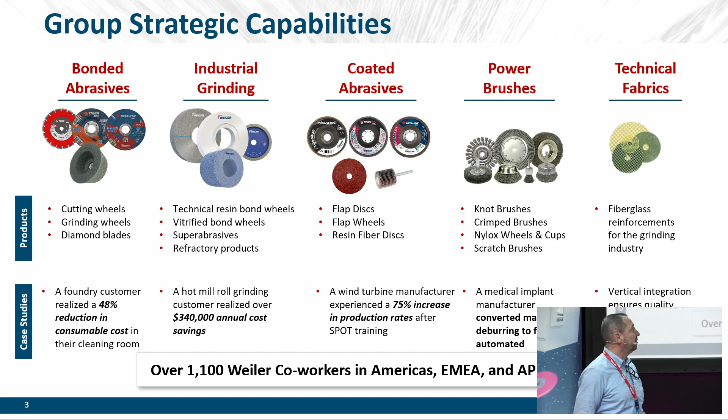During these five days we heard a lot of: who's Weiler? Where are you coming from? Because we're new, we're the new kid on the block, nobody knows us. That's why we decided to give a small introduction of who we are, where we come from, and what we're doing. We're coming basically out of the US.

Weiler is a German name coming from Pforzheim, a family from Pforzheim. In 1800 they came to New York as brush manufacturers, because in the Black Forest there are a lot of brush manufacturers. He found this energy in the US and started making brushes. That made us a brush manufacturer in the US - all kinds of wires, brushes, steel, Nylox, whatever. There was an evolution going to flap discs, coated abrasives. Weiler was one of the first to introduce the production of flap discs within the US.

Then finally they wanted to grow the business, and they bought a company, Swatycomet in Slovenia. Directly they became the owner of bonded abrasives, cutting and grinding, and our well-known industrial grinding. So that's in a nutshell what we are standing for.

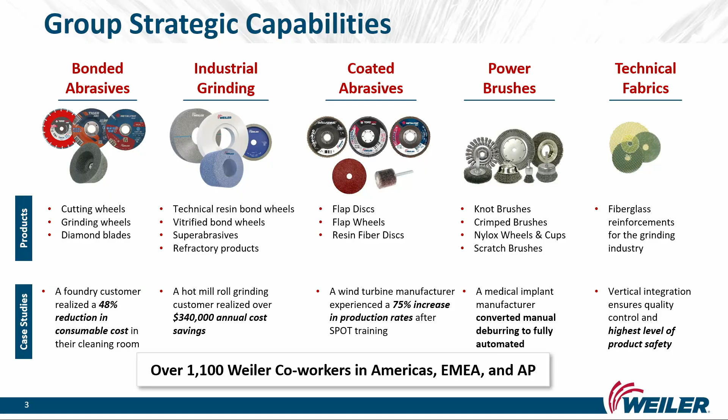Where are we? Cresco is the headquarters, about 1 hour from New York. There we still produce all our wire brushes. In Mexico we are producing the flap discs. In Brazil we have a small production of cutting and grinding, and mainly our foundry, small products, manual, like the pins and the small grinding wheels. That's for North and South America.

Coming to Europe, we have a warehouse in Bindlach, Germany for the German market, which is still the biggest market in Europe. And Slovenia - there we have 3 plants. The headquarters is Maribor, in the north, the second city of Slovenia. There we produce all our technical wheels, from vitrified to resin to CBN, the super abrasives - everything to do with industrial grinding, we produce in Maribor.

30 kilometers south we have Zreče, where we produce the cutting and grinding discs - 10 million pieces a month, which is an impressive number. Very high automation, high standing, state of the art for our production. In Loče, we produce technical textiles that we need for our cutting discs and for the reinforcement of our cutting discs. So that's in a nutshell where we are, who we are.

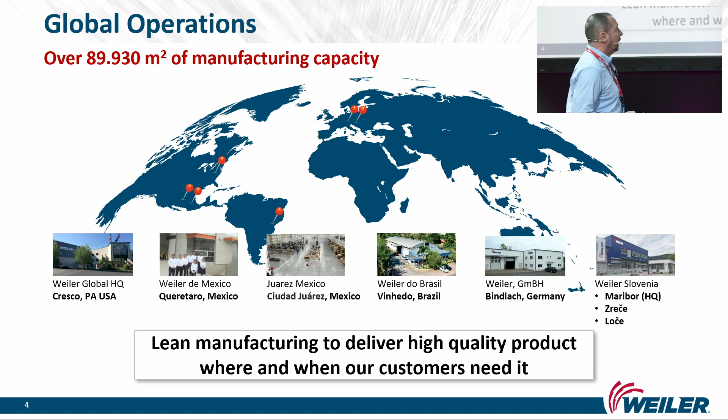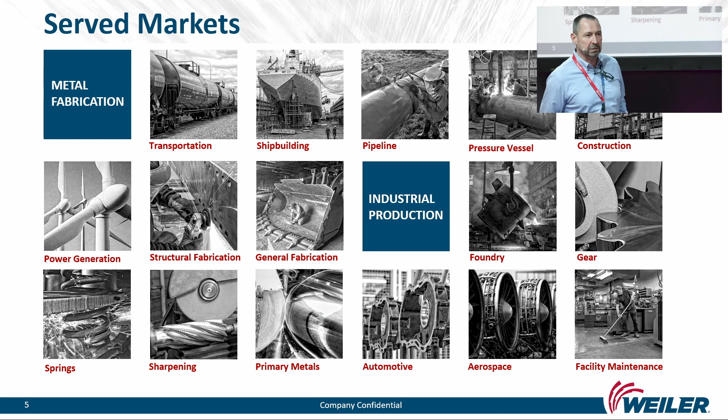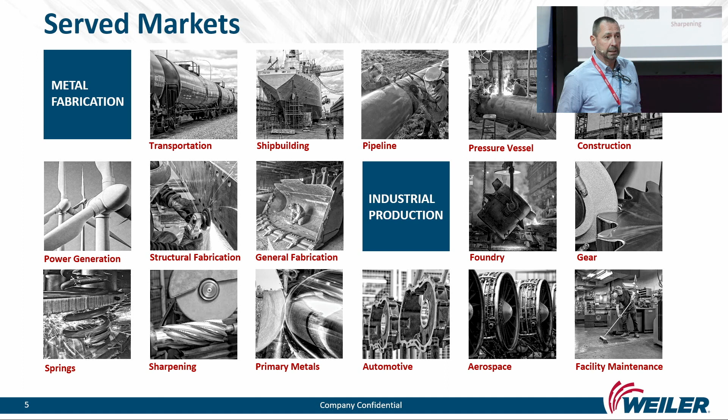Our markets are mainly cutting and grinding, transport, shipbuilding, construction. If we go to the industrial grinding part, we have the foundry, which is the heavy metal industry, the steelwork, but we also go to sharpening, aerospace, automotive, bearings. One particular thing is spring grinding, which is a specialty of our company.

Again, we've got the snagging wheels, the resinoid wheels for rough grinding, and we've got the more vitrified wheels for precision grinding. Springs sit right in the middle - it's precision, but with resin bond.

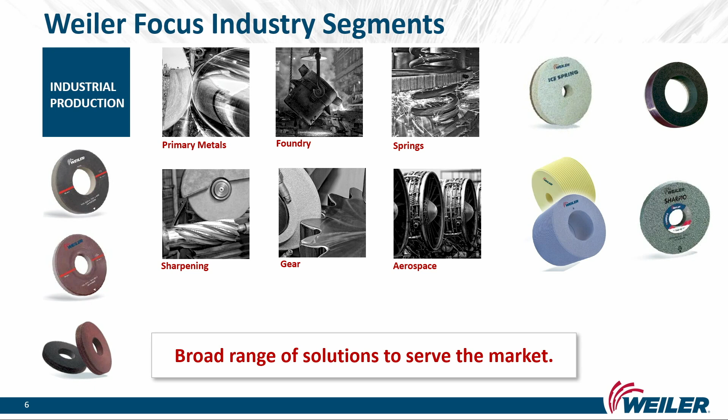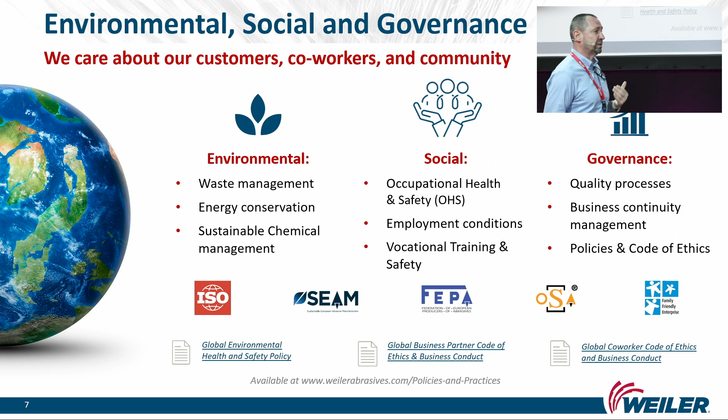So we're not working in a garage, as you've seen in the former slides. We are a member of FEPA, the Federation in Europe. We are OSA-certified for the security of our products - that's a high value - and of course all ISO standards. SEAM, sustainability - we're in Slovenia, there's a lot of nature, as people who know Slovenia understand. So SEAM is extremely important for us. It's the future trend, but for us as a company, it's one of our core values.

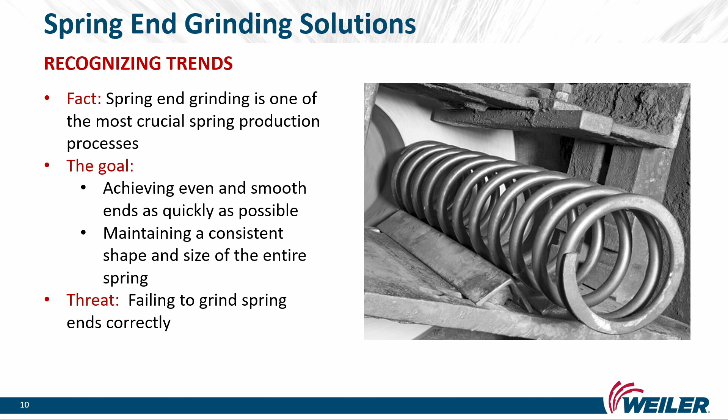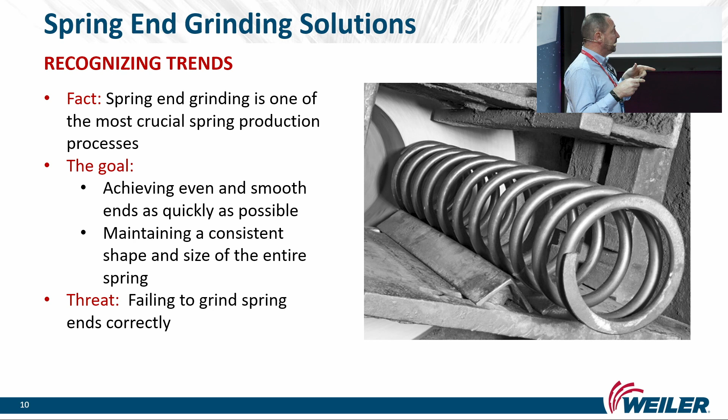Let's go to spring grinding. One of the crucial parts of producing a spring is the end, the measurement, and the surface. That's why we grind. This is the crucial part. We need to maintain the tolerances, and we do that by grinding. It's a very complicated operation that takes time, so we're always under pressure to bring more performance in one way or another.

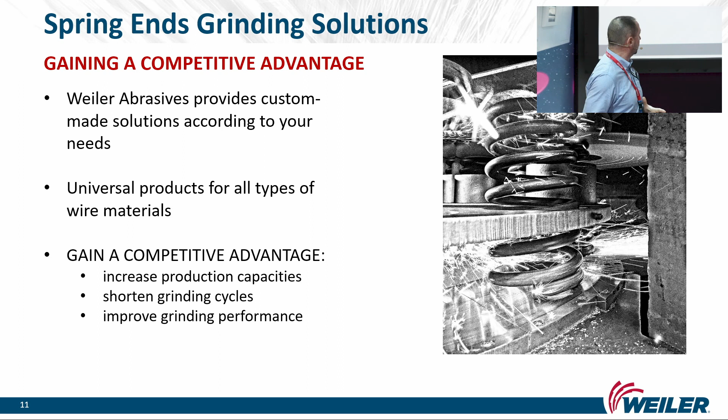In spring grinding, mainly, we have a table that is turning, for people who don't know, and the spring comes in the middle. The number of passes we do reduces the spring to the required dimensions. Of course, we try to increase production capacity by shortening the grinding cycles and improving performance.

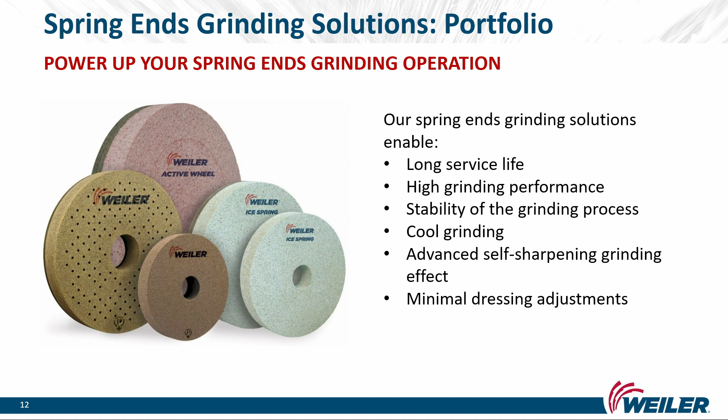So this is our portfolio. We will go into depth after that. We serve a bit of everything. We have three major standards within our spring grinding manufacturing. So what is our solution?

The first one is the common one that everybody knows, with the perforations, with the holes. Why do we need these holes? We need them for a cool cut, and also so that some stock removal we can't absorb gets into the holes. After that, it's cleaned up with some compressed air.

Now, the main challenge in the spring grinding industry today is that it's a resinoid product, with fluoride in it. It's a general topic now coming from Scandinavia. There's a new target to have wheels without fluoride. We're working on this because we know Scandinavia starts and then it slowly moves south, and when it comes to Germany, it becomes a rule. So we're discovering, developing with partners in Scandinavia these fluoride-free resin wheels. This is a really hot topic, and in the values of our company it's one of the highest priorities.

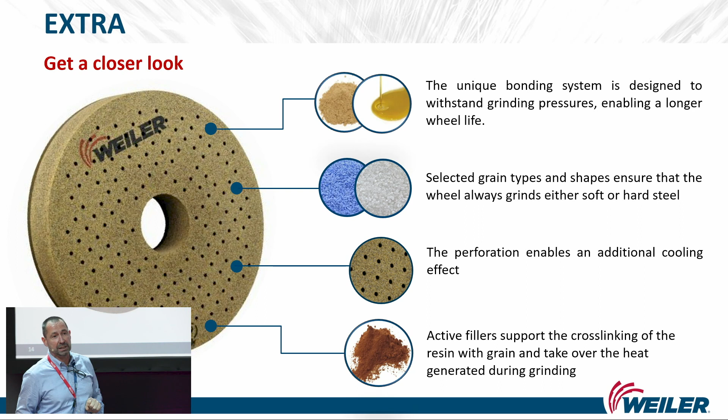So mainly, the big point is the filler, as you heard, the fluoride. That determines how good you are, how good you can perform, and exactly that filler is under a big challenge. Of course, we also have a selection of grains and our bonding system. This is a standard wheel.

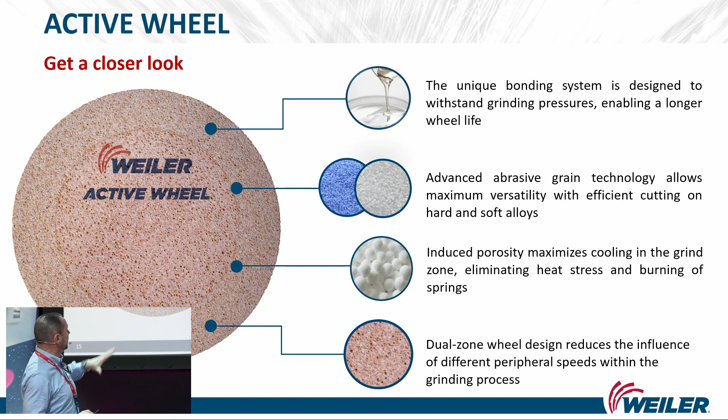Coming to the next one, it's getting a bit more technical. This is a wheel without a hole, without the bores you see. As you see here, it's a two-layer wheel. Why do you need a two-layer wheel? Because first of all, it's the same bonding system, slightly different, with a lot of porosity added, a hollow ball porosity. It's an artificial porosity we add to have the cool cut, like you saw before with the holes. Why do we need these two layers? One layer would be sufficient. Now we found out at Weiler, if you see, it's very simple, in fact you need to know it.

But if you look deeper, at the outside, if you have 100% of your speed, the further you go inside, the lower the speed is. That influences the parameters, it influences your performance, but it influences your roughness extremely highly. It could lead to burning marks. That's why we have these two layers: outer, we go with a rough grinding wheel; inner, we go finer, softer. This gives a good, cool cut. And that's where we already have a first step, where we're not only delivering a wheel, we also add value.

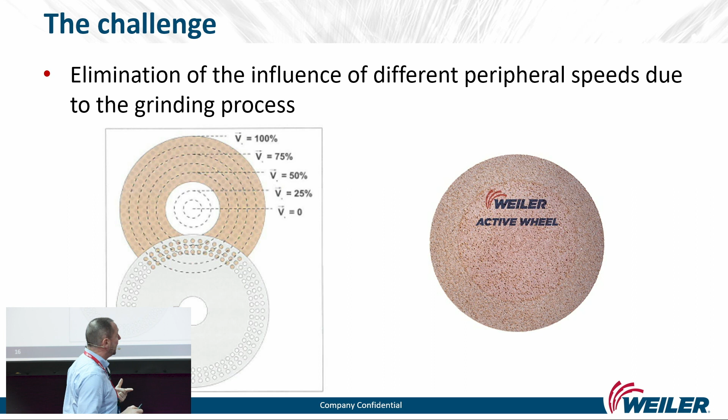And then last but not least, we've got the ice spring. It's just a word, but the key point of the ice spring is the bonding system. It's a liquid bond, an innovation from our company. It's a liquid bond, and we surround the grain well, and we add a lot of porosity. The big advantage is that we can cover all the diameters of the springs, with high performance, no holes, meaning a lot of grains are working, and we have this cool cut.

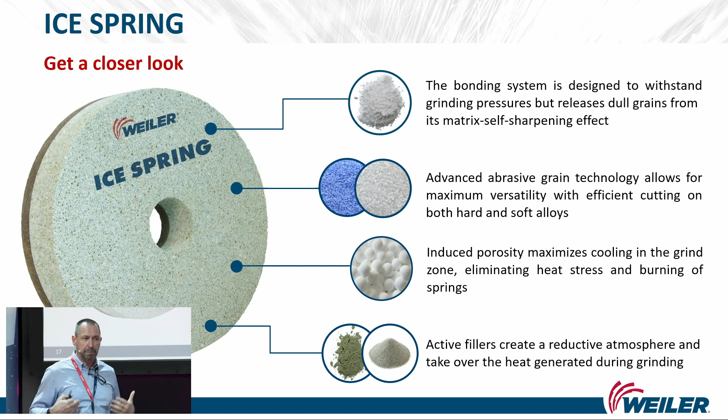This active filler, of course, is an internal component, but here too we're under high pressure from this fluoride issue, because this is the key that everybody knew or used, and that's now the challenge for us. We're the pioneer in this, we can say that. That makes us attractive to high-end customers who are looking for solutions, not only a price, but also sustainability. And as a matter of fact, the Scandinavians are in the first line, directly followed by Germany.

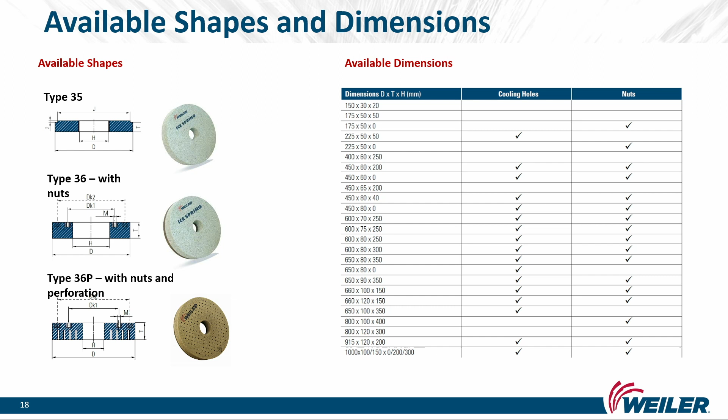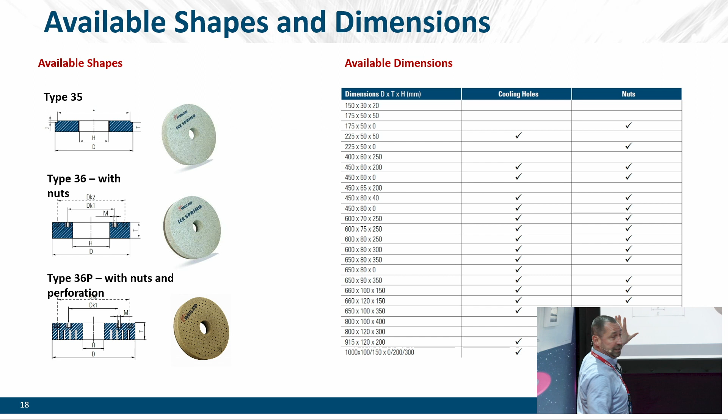Of course, we offer all these wheels from small parts, 150 up to 1,000. We can make everything with the nuts and with the holes. And the form 35, 36: the 35 is the one we glue on a plate, the 36 is the one we fix on the plate with screws.

So we have different—this is a challenge because a spring is a spring, but it's not a spring because you have different diameters. You have a small diameter for the pharmaceutical industry, for high precision, even the watch industry, going up to the big ones, 23 millimeters for the trains, for the big machines. All that needs to be covered.

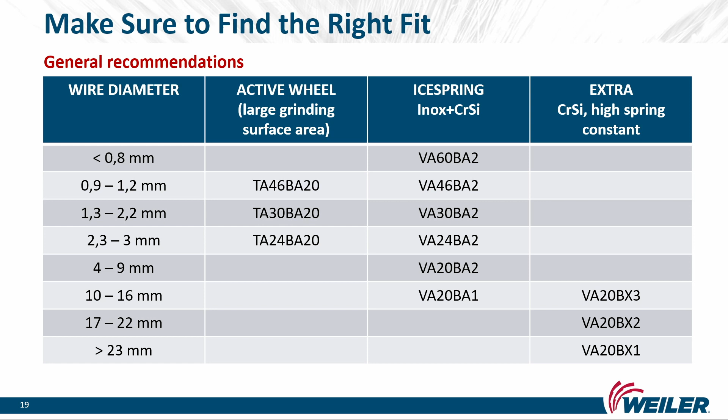Of course, different diameters, different machines. For the small springs, really below 1 millimeter, we go with a very fine grit just to have a fine surface. We cannot work with holes because these small springs would block up, right? So up to 10 millimeters we can work with holes. Otherwise, we need to go to our innovative products like the ice spring.

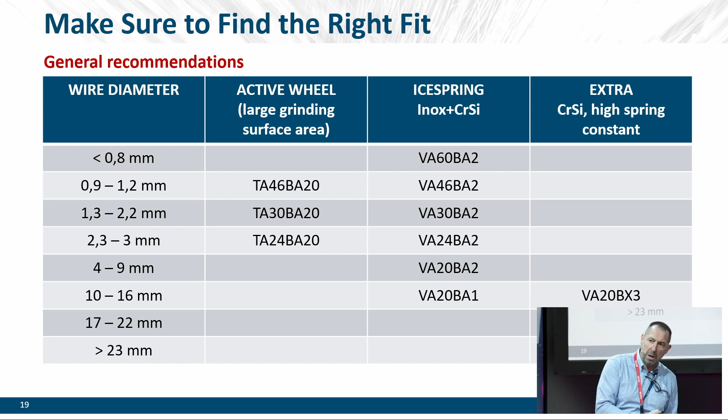The bigger the diameter of your spring, the rougher the grain—that's the rule. The more stock removal you have, the more you need grains that can cope with this. So we go from grit size 20 up to 60, sometimes up to 120.

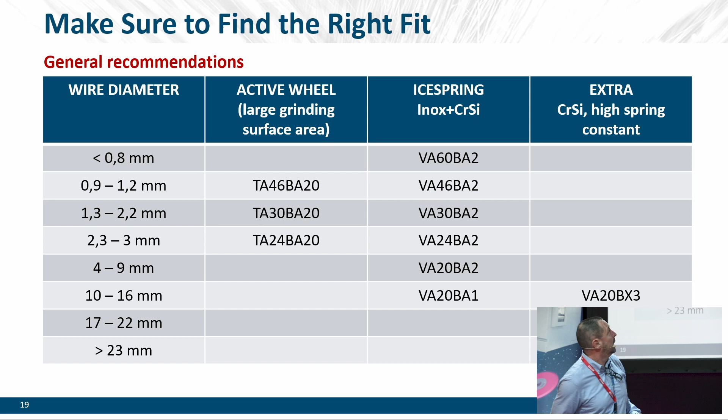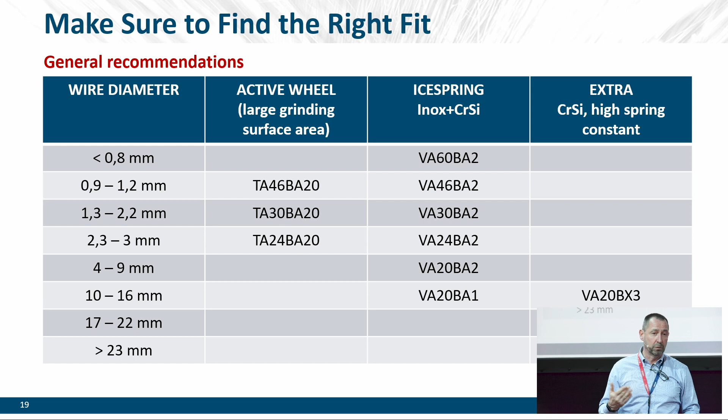There is a new trend in the 1 millimeter and very fine springs going to the super abrasives, to have high volume, high performance, but also high precision.

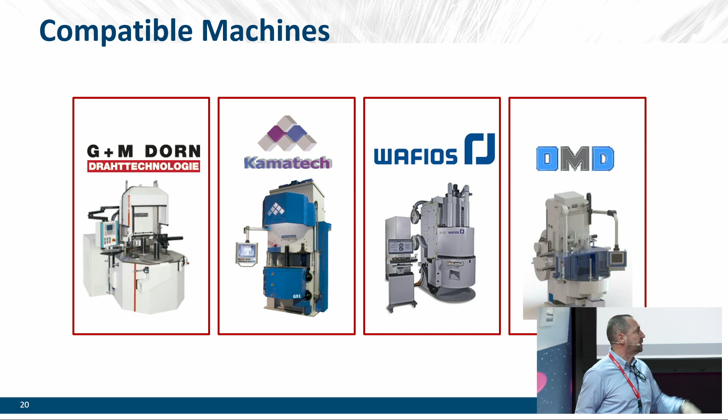Now, these are the machines—mainly the Dorn, the Kamatech, the WAFIOS, the OMD. There are several, but these are the big ones, the most common ones that we have in Europe.

Of course, not only the wheel is important, but also how you dress it, through the production process. By grinding the springs, you make the wheel unflat—there are some waves in it. You need to flatten it up.

A lot of our customers are working with HSS material to flatten it up. We developed a dresser with a metal bond with diamonds to have a smooth surface, so we dress it with a diamond to have a flat and smooth surface.

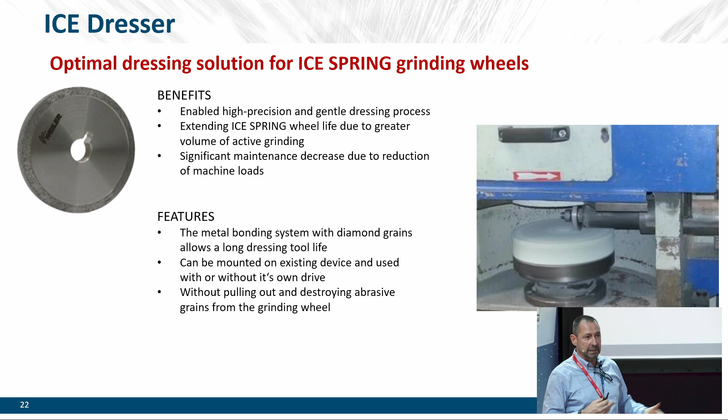Otherwise, we found out that we rip off the grain instead of cutting it, and that makes a big difference when you're in fine grinding. The advantage is this wheel, or this dresser, lasts a very long time—it's reusable because you can turn it. That makes it easy for us to sell it as a system, not only as a product, but as a performance dresser and grinding wheel.

So why would you choose us? Of course, because of our technology, because we try to have a long partnership, a long relation. We think this is important because trends in the markets are changing. You need to inform the customer, or the customer needs to inform you, where the company is going—what direction do you want to go?

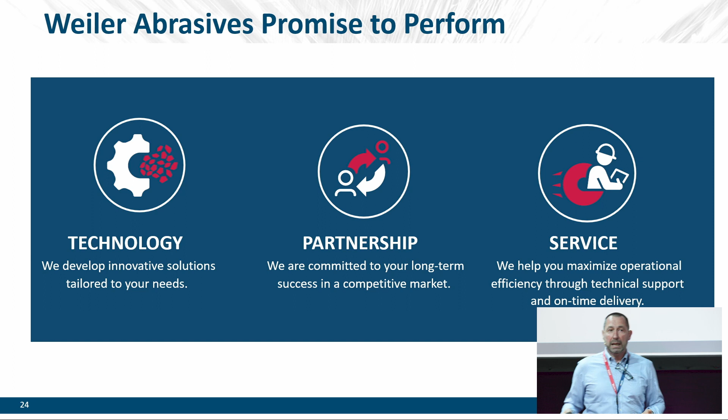Do you want to go more into precision or the pharmacy industry, or more into roughing? We need to know, we need to understand. It's not one-direction communication, it's a dialogue. Of course, service is very important—when there is a fire, we can react.

Now we have this, the Weiler process solution, which is to listen to the customer. Of course, we go into the technical details, and we'll have a case study afterwards, but I want to avoid getting too deep into technical specifics because every machine, every customer is different due to these parameters.

What's important for us is going through the different questionnaires necessary—from the material to the machine to the end part, the tolerances, the roughness. We can do it over the internet, of course, by Teams, but sometimes you need to see the state of the machine, and then you think, oh, we need to have some other discussions first before we start.

So it's important that we have well-trained people. Sorry to say, in school we don't learn a lot about grinding, so we have our own academy in our company to educate and train people to look at—which means, of course, also with us in production, they can see, feel, and smell the difference in our different products.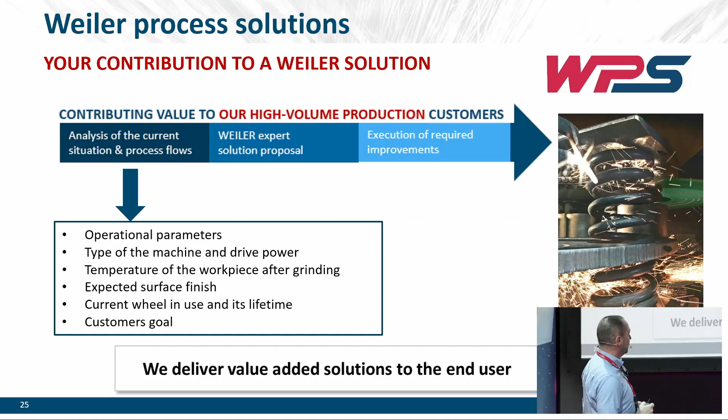Why? Because we have our ideas, and sometimes customers say, hey wait a minute, I need to go back because that's how I see it. So have an adjustment with the customer and then do the next step. It's really important, that dialogue one to another. The unidirectional approach is over, right?

So now let me take my paper, because this is just a success story with the Ice Spring. The challenge is always the same - they want to do everything with one machine, everything. And if I listen to the dreams of our customers, they don't want to grind. It's just a necessity to achieve their production or their tolerances.

So the big challenge is always the material. They want to do carbon steel and stainless on the same machine, with the same performance, and one wheel. That makes it a challenge all the time, because the Ice Spring, as you can see, this is just the name - behind that there's a variety of different grains, bonds, hardnesses, and porosity.

In this case, it's a 450 by 80 by 100, a standard wheel. And we found it out with our Ice Spring, grit size 24 and this BA20. That's the key for us - it's the bond, that's what our chemical engineers are putting together.

We found out - I mean, we had, sorry I'm getting a bit old, I need to put my glasses on - now, the advantage is the number of springs, because that always talks, right? We had 98,000 springs that we grind, and before we had 68,000 springs that we grind with one wheel. So we lifted up from 68,000 to 98,000 with one wheel.

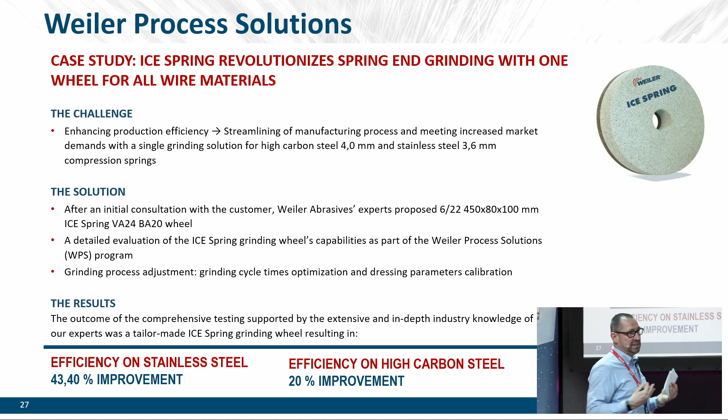And that made this customer very happy. That's the message we want to bring over through the fair, to our customers, to social media - that there's a new kid on the block, and we're growing in our markets, you will hear more from us soon. So thank you for being here and attending this short introduction on our company and our spring grinding.

Sensational, Konrad - excellent last presentation on stage. But if you don't mind, I still have a few questions. Yes, please. But before that, any questions from your side? You're a colleague, so it's okay.

So what was really surprising for me at the very end, you mentioned the use case. I was asking myself the whole time how many springs we are talking about, so that a business of grinding wheels, especially for springs, is worth doing. You mentioned you came down from 98,000 to 68 - no, other way around, that you can do more with one single grinding wheel.

So I imagine now, how much is a grinding wheel, like the Ice one, on average? How much is it? I can give you a good price, but let me say - no, on average you need to count the selling price.

The 450 you need to count, that's about 400 to 500 euros. Okay, let's take 400 to 500 euros. So you save this, coming from 68 to 98, roughly 100,000 springs being grinded with one wheel. And you are selling, I guess, a few thousands of them, because otherwise you can't have so many plants. So how many springs are grinded with your solutions?